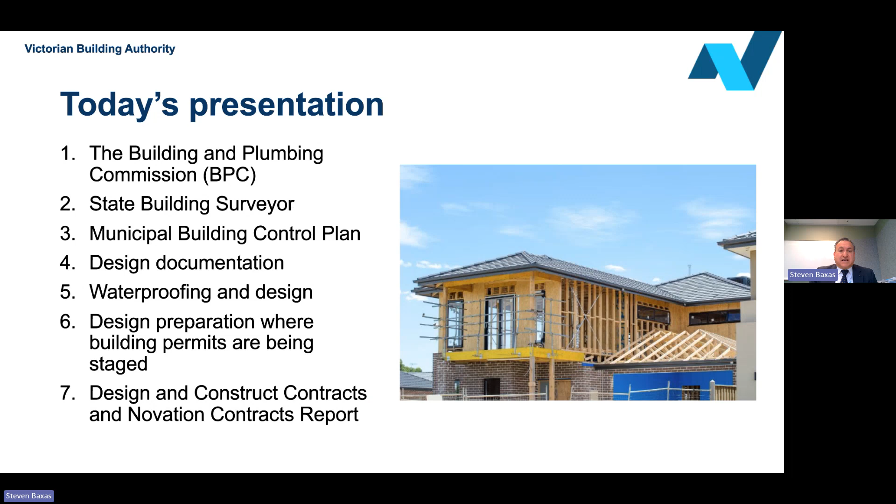So let's kick off with the BPC. So in October 2024, Victoria's new integrated building and plumbing regulator was announced.

So later this year, the VBA will be joining forces with staff from the Domestic Building Insurance Division of the Victorian Managed Insurance Authority. That's a heck of a mouthful. For short, VMIA, and the Domestic Building Disputes Resolution Victoria, which is DBDRV. And that's going to create the new, bigger and better regulator.

So effectively, the new regulator, the new commission, will be a one-stop shop for consumers on building and plumbing related matters. That's effectively the main change, and that's why we're changing. It's not just a changing name, and we know that's happened in the past. This is actually a full and proper redesign, including hundreds of new staff.

So this change is the most significant reform that we've seen in this industry for decades, and it puts consumers and consumer protection clearly at the front in terms of the government's regulatory priorities. Creating an overarching, more powerful regulator that addresses the life cycle of the building process will create a better consumer experience, and that's the hope here, and support improved standards and quality in the building industry overall. So this new entity will be a real game changer for consumers and practitioners and for people in Victoria.

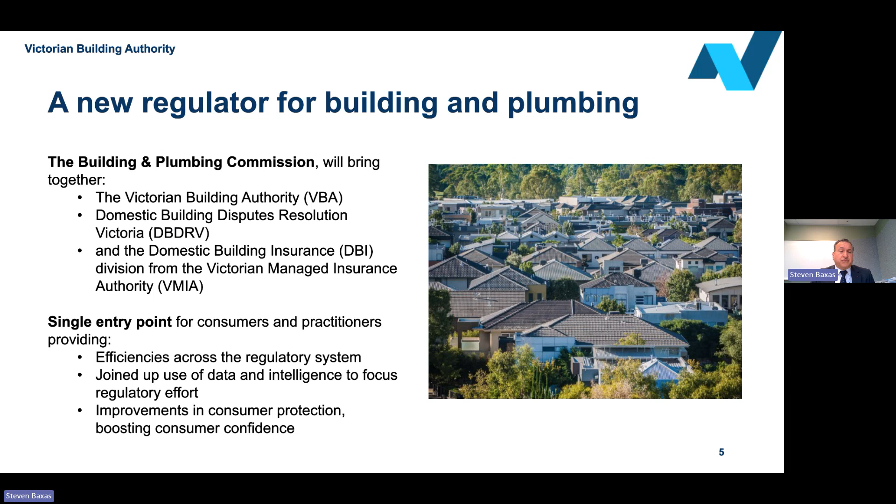So more information will be communicated to industry. You'll all have many opportunities for engagement, and we'll need your views leading up to the changes. It's an incredibly jam-packed reform agenda, 6 bills going to Parliament, numerous regulation changes that will all have RISs. So you'll have plenty of opportunity to have your say, and I encourage you strongly to please read these things, because it's through consultation that we get these things right. So there's a lot happening. Please be involved. So 4 elements of building reform.

The announcement of the formation of the BPC has also heralded a suite of new powers that will effectively improve consumer confidence in the building system. The new rectification order power, you may have heard of, will allow the regulator to act against the builder after an occupancy permit is issued. The rectification order is intended to apply prior to the issue of the OP as well, but more often than not, defects are found after. So this is really important, because it's only after a building is occupied that homeowners and occupants of apartments realise that there's defects in the building.

We'll also require developer bonds for apartment buildings over 3 stories in height. There's an additional requirement, above all this, to notify the VBA 6 months prior to the issue of an occupancy permit, so that the building can be inspected and assessed. And hopefully we can ensure that we catch some of these things before the building is actually occupied.

So domestic building insurance will be expanded and will be a first resort insurance. This is an absolute game changer. So this means that the builder no longer has to be insolvent, disappeared, or died before a DBI claim can be made, as is currently the case with the last resort insurance system that we currently have.

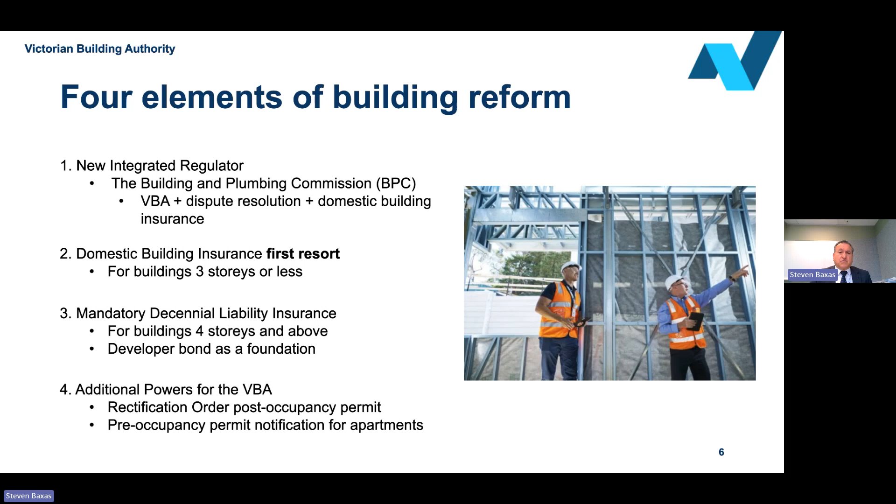I'm going to talk a little bit about the new BPC. So in summary, establishing the new BPC will create a single entry point for consumers. This is the best opportunity that we've had in 30 years to improve consumer confidence and consumer outcomes. A focus of mine as the SBS will be in improving practitioner competency and knowledge. And this is the key to unlocking real change.

Insurance itself isn't the solution for all the problems that we have here. And I'll be addressing some of those additional things that I'm asking practitioners and architects to do. So by equipping builders and plumbers with the information they need to do the right thing, and by providing guidance to other building professionals, in particular building surveyors and architects, we will be helping to reduce defects from occurring in the first place.

So the VBA has pivoted its education focus, and you may have seen some of this, to target the most frequent non-compliances, and is using this as a basis for the current practitioner education series. So we're reaching more people in more places on social media. This is something that the VBA has done that's quite new, and we're quite surprised by the impact that it's had, with the VBA's videos highlighting non-compliances on construction sites. This seems to be something that people are really attracted to and watch.

We're receiving at the moment more than 1.2 million views in the last 12 months. So it's quite significant compared to the way that we were communicating with industry prior to that. These are by far the most popular videos, as I've already stated, and we're going to do more of these because there's a lot of interest in these.

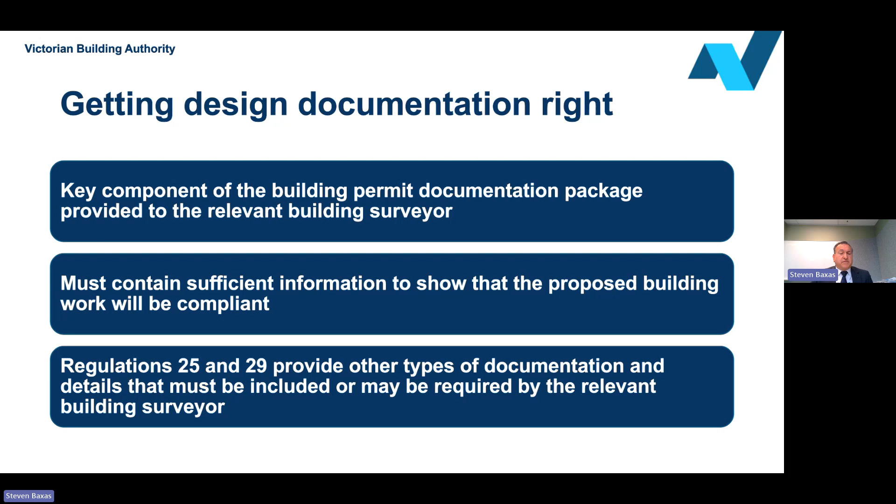So poor design has plagued us, and there's lots of instances of that, and there's lots of anecdotal and real evidence that is the case when we see building defects. So the adequacy of design documentation has been the subject of industry scrutiny, with findings that suggest that there's a real link between poor design documentation and project variations, increased construction costs, and potential non-compliance of building works.

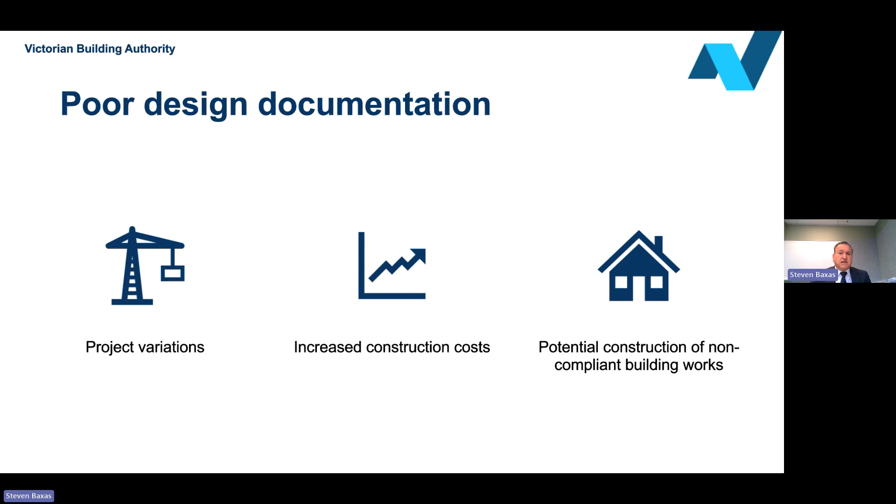So for clarification, my reference to poor means non-compliant and sometimes insufficient. So it's not just non-compliant documentation, it's insufficient documentation. So the VBA's Compliance and Enforcement and Inspection Program, the Building Documentation Audit Program, the Building Confidence Report, as well as incidental and anecdotal feedback from the construction industry, provides evidence that supports these findings, in particular within the multi-residential building sector. And I think the mid-rise buildings, those between 4 and 8 stories, feature quite largely in defect reports.

Design Standards Working Group. So the VBA is actively working with industry to elevate the benchmark of design documentation. We established the Design Standards Working Group some time ago, and it includes stakeholders and members from architectural and draftsperson design groups. This working group tackles a common concern of building surveyors, the role of designers in construction, and the adequacy of documentation prepared and approved as part of the building permit process.

It seeks to develop a practice guide to address issues identified as stemming from poor documentation, investigate the current practices of documentation for building permits by design practitioners, and importantly, sets out the minimum standards and details required in the design documentation by an RBS when assessing an application for a building permit prior to the issue of that permit.

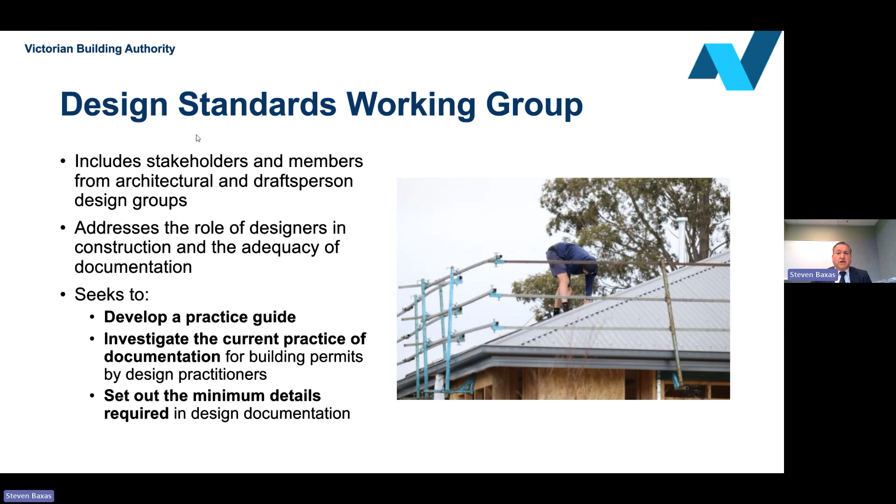So the practice guide's been advocated by industry and was highlighted in both the expert panel building system review and the building confidence report as key areas that require to be addressed. So the practice guide was developed to help improve design documentation by highlighting information required and how compliance details and supporting information can be documented for building and structural designs. So hopefully it's been used. We've had some great feedback about this document, which has caused us to expand it to other classes.

I want to talk a little bit about waterproofing and design. So the VBA's regulatory priorities inform industry, consumers and other regulators of our areas of focus to address the most significant harms in our built environment. One of the 6 regulatory priorities is water ingress in buildings. This is where design plays a really big role. Waterproofing defects can have significant impact on homeowners, communities and the economy, indirectly. Impacts of water ingress include costs to rectify the defects, increasing maintenance costs, increased insurance premiums, which ultimately reduce consumer confidence in the building and construction industry.

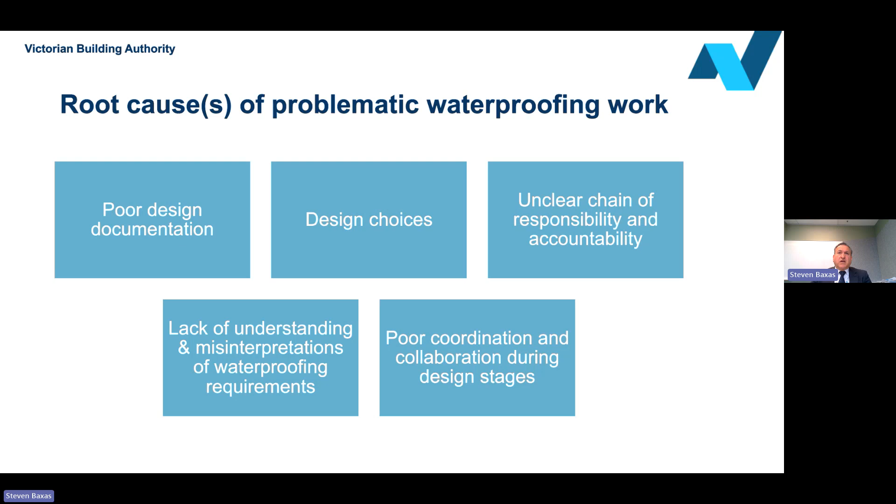So, improvement opportunities for waterproofing. So the research identified improvement opportunities for building design, certification, construction, inspection, and improved guidance for waterproofing, including improved practitioner education and awareness around high-risk areas such as balcony design, construction, and water tightness of external building envelopes, and the consequences of poor waterproofing and waterproofing practices.

Prescribed critical details for inclusion in drawings and building plans, increased supervision of the design and construction of balconies and other high-risk building elements such as roofing, waterproofing through mandatory inspections, which has also been proposed. And you may have heard something about that. There's a regulatory impact statement about to come out that's going to detail that a little bit further.

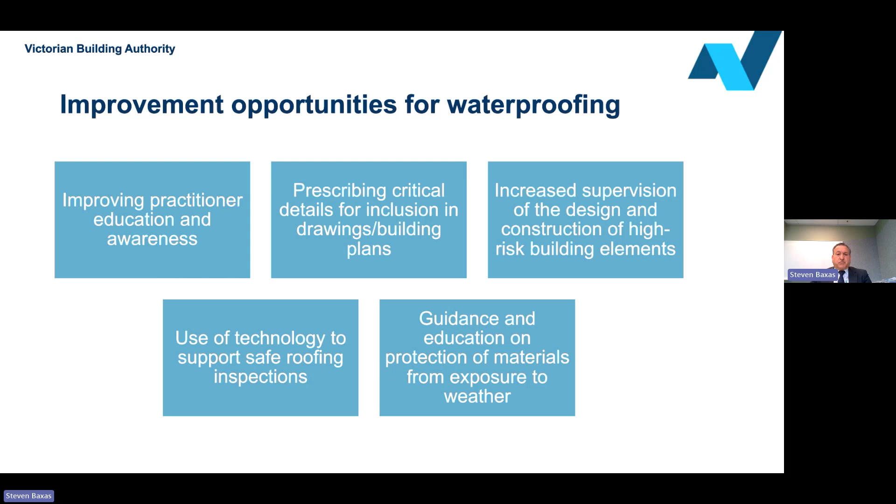And again, that's an opportunity for you to talk a little bit about your views on these additional inspections, one of which is waterproofing. Developing guidance and education on protection of construction materials from exposure to weather. That's another thing that we need to sort of have some regard to.

So NCC 2025, now we don't really have a date for the introduction of the NCC 25 at this stage. I understand it has been delayed, but we just don't know for how long. So the ABCB are proposing changes when it does come in Volume 1 to help reduce the incidence of building defects resulting from water ingress. So these changes went out for consultation through public comment last year. You may have seen that and hopefully you've contributed to that.

So these changes include new DTS provisions for drainage and grading of external areas, which will establish grades to structural substrates in buildings and building elements such as concrete roofs, balconies, podiums, and similar parts of buildings. This will require concrete roofs, balconies, podiums to have step downs from internal areas to external areas. Additionally, these areas would require integral hobs at their perimeters. It also includes a new DTS provision for substrate materials to require a structural substrate in the building or part of the building of a roof, balcony, podium, or similar level.

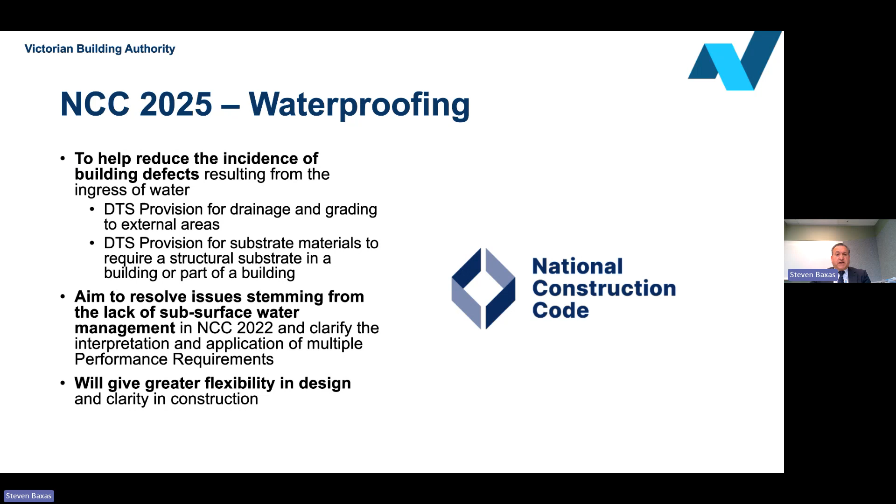So these changes aim to resolve the issues stemming from the lack of subsurface water management that appear in NCC 22. There's very little in NCC 22 that addresses that, and clarify the interpretation and application of multiple performance requirements. So it's a more holistic approach to water management by including these provisions to address subsurface water in addition to the current requirements for surface water. These changes will require more design documentation, and this is where you come in, and collaboration between designers, building surveyors, and builders.

So design preparation where building permits are being staged. This is another real area of concern that we're having. Staged building permits provide a significant challenge to achieving compliance, in particular for large building projects where the design and construct method is predominantly used. I think we're seeing that more and more in larger buildings. Our legislation is clear. The RBS must be satisfied that the design submitted prior to the issuing of a building permit and each stage of a building permit must demonstrate compliance in its own right in order for the RBS to be satisfied and issue a building permit for that stage.

However, in these staged works, there are challenges for the design team and the RBS in ensuring the proposed design as submitted clearly demonstrates compliance with the overall and then broken down into stages of the works. So additionally, once the building work has commenced on site and as part of the initial building permit stage, it becomes further challenging for the RBS to ensure that only the stage approved has actually been constructed. I think that's a real challenge for the building surveyor. It's very difficult to slow a job down or stop a job once it's constructed, and it's incumbent on the building surveyor and everyone else involved to keep up. But the builder's definitely doing something wrong if they're building beyond the stage.

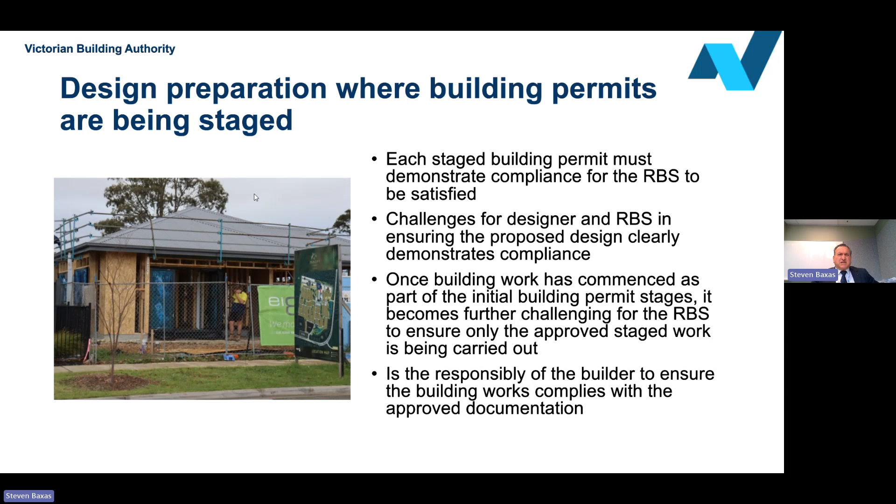So I'm going to talk a little bit about D&C contracts now. So as part of the 2021 work plan, the BRAC, which is the Building Regulations Advisory Committee, undertook to examine and make recommendations to the Minister for Planning on D&C contracts and novation contracts.

They developed a report on the effect on the building sector of design and construct and novation contracts. That identified the adverse impacts of these contracts on the construction sector. They identified proposals for improvement, and it articulated a plan to deliver these improvements. There was understanding that D&C contracts and novated contracts increased risk for the consultant team, and it is also contributing to the professional indemnity insurance crisis that we're facing right now in the sector.

I know Frances will speak more about this topic next, but I wanted to reinforce that D&C contracts do not supersede the requirements of the Building Act. Whilst a builder can change the design of a building during construction, they cannot build those changes until the building permit documentation has been updated, and that's really where you come into it, and until the building surveyor has actually amended the drawings.

So this is an area of focus for me right now in my role, in talking to the whole sector about making sure that they're getting this right. It's crucial to ensure that the design of the building is complete.

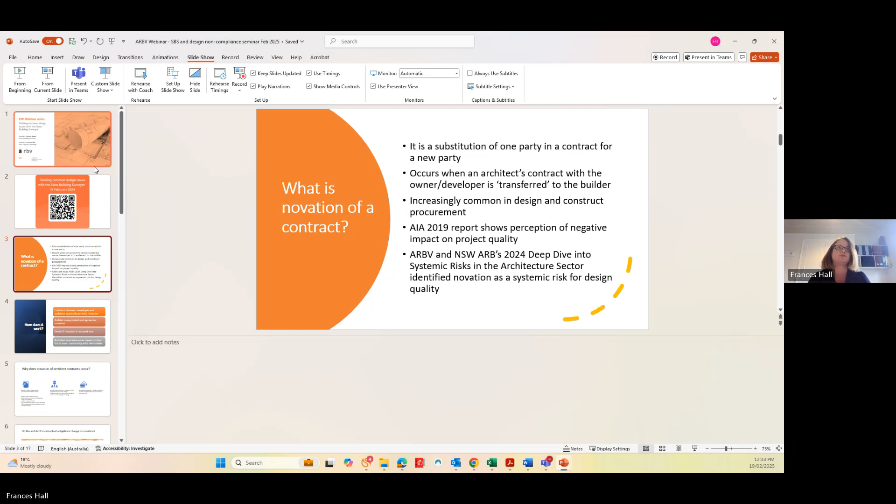I'm just going to increase my slides. Hopefully people can see that.

So how does novation work? The way it works is that a developer and architect enter into a contract. That contract will expressly permit the later novation of the architect. The architect prepares a preliminary design. The design goes out to tender. A builder is appointed, and in the agreement between the builder and the principal, the builder agrees to novation.

So a deed of novation is then entered into, and that means that all of the obligations that the architect previously owed to the owner or developer are now owed to the builder. So it's the same contract. It doesn't necessarily mean that the obligations have changed, but from the architect's perspective, your obligations are now owed to a different party, being the builder.

So why does novation of architect contracts occur? It occurs because it provides some benefit to the principal in that the builder accepts obligation for meeting the design requirements in the preliminary design, as well as for constructing the building. It also means that there is a benefit to the builder because the builder is able to tender for a fixed price, but then engage in a value management process to save on the build cost.

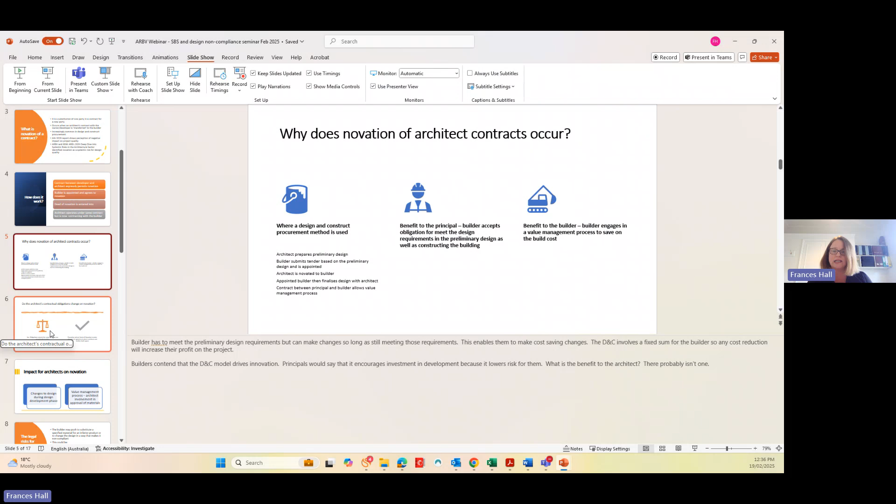Bear with me, I'm just going to change into presentation mode. Hopefully that's better. Apologies for that.

Do the architect's contractual obligations change on novation? As I mentioned just now, no, they don't. The obligations remain the same, but they're owed to the builder. And the only exception to that is where the deed of novation creates changes to the agreement, and that would involve both the architect and the builder agreeing to that.

So why is that important? It's important because it means that you as architect still need to comply with the terms as specified in the contract. So, for example, if the contract specifies that you are responsible for design compliance, that doesn't change when you are novated to the builder. That contractual obligation will still exist.

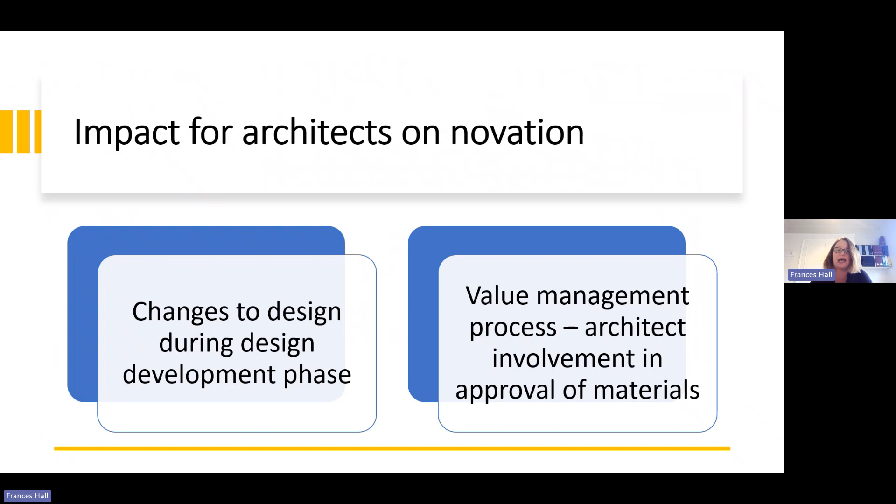What that means for the architect is that it essentially creates a problem, because the contractual obligations on the architect to comply with, for example, a contractual provision requiring design compliance might not be consistent with this value management process. It also creates a problem because, as Steve has pointed out, the building work is still required to comply with the designs that have been approved in the building permit. And I'll talk a bit more about that in a minute.

So what might happen? The builder might push to substitute a specified material for an inferior product, or they may seek to change the design in a way that makes it easier and therefore cheaper for them to build, but that might not be compliant either with the building code, or it might not be compliant with the permit, which has been approved on the basis of a specific design.

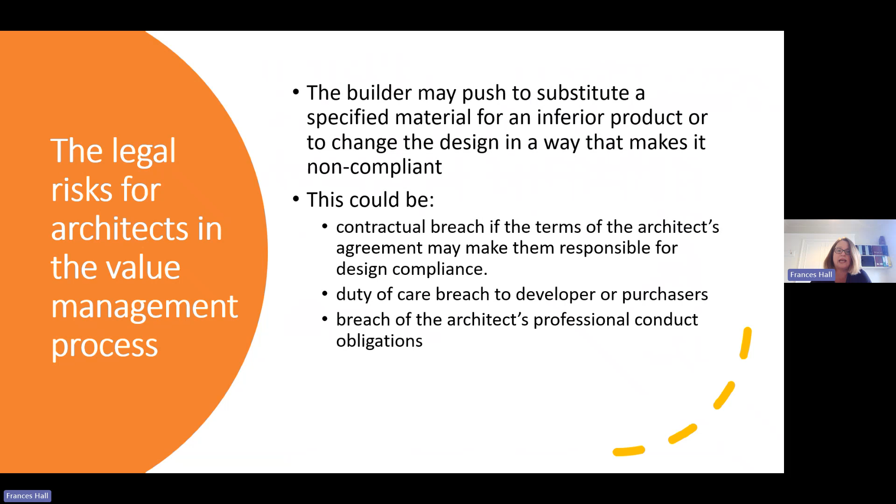So this could be problematic in a number of ways. It could be a contractual breach if the terms of the architect's agreement make them responsible for design compliance. It may constitute a duty of care breach to developers or purchasers, and it could be a breach of the architect's professional conduct obligations. So there's a lot of risk sitting for architects in this process.

I've created this slide because I think that builders don't understand particularly well the distinction between contractual obligations and legislative obligations. And I think it's a good idea for everyone involved in building work to really apply their minds to that. So builders may have entered into a design and construct contract, which contractually allows them to make changes to the design, but under Section 16 of the Building Act, the building work must comply with the building permit.

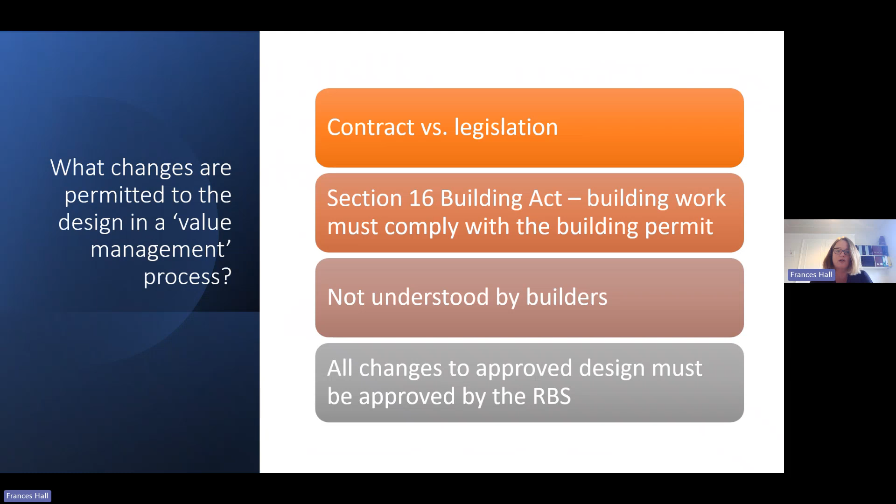So they can't just go off on a frolic and change whatever they like. The design still has to comply with what's been approved by the building surveyor. And if it doesn't, then it needs to go back to the building surveyor for consideration. So that's important, I think, for everyone to understand.

I've just also put in a comment about performance solutions, because this is something that does crop up in the context of either insufficient details being in drawings, or in the context of last minute changes to drawings.

So performance solutions, as I'm sure you would all be aware, can be used to demonstrate the compliance of a design with the relevant operative provisions of the National Construction Code. Performance solutions have to be prepared and assessed in a particular way as part of issuing the building permit.

But what you can't do is where there is insufficient detail in the drawings, and take, for example, the scenario that Steve posited to you, where there are no details regarding the guttering, and a plumber has gone up and tried to retrospectively create a box gutter. You can't retrospectively create a performance solution and then say, look, we've complied with the BCA because here is a performance solution. That's not the way the process works.

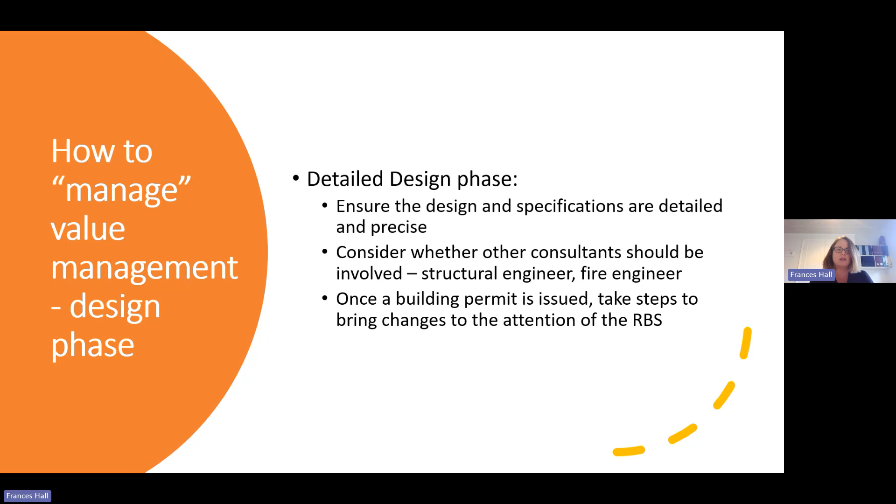Other steps that you can take during the detailed design phase are to, as Steve has mentioned, ensure that the design and the specifications are detailed, complete and precise, and to consider whether other consultants could be involved, such as the structural engineer or the fire engineer. And once a building permit has been issued, take steps to bring any proposed changes to the attention of the RBS if you believe that what is being proposed goes outside what's been approved. That's a step that you can take to protect your position.

Now, in the construction phase, there are some additional steps that you can take to manage this value management process that builders are imposing. Where you are required to approve materials, you should really turn your mind in a lot of detail to what the specifications require about the compliance of products or materials. And that isn't just the specific clauses of the spec that go to this particular product, but also the general clauses in the specification. Do the general clauses require you to consider compliance?

And if they do, then you should be making sure that you're calling for the right documentary evidence that supports that compliance. And in addition, where you are supplied with documentary evidence about compliance, take a good look at the material and ask yourself, does this documentary evidence specifically relate to this type of use of this product?

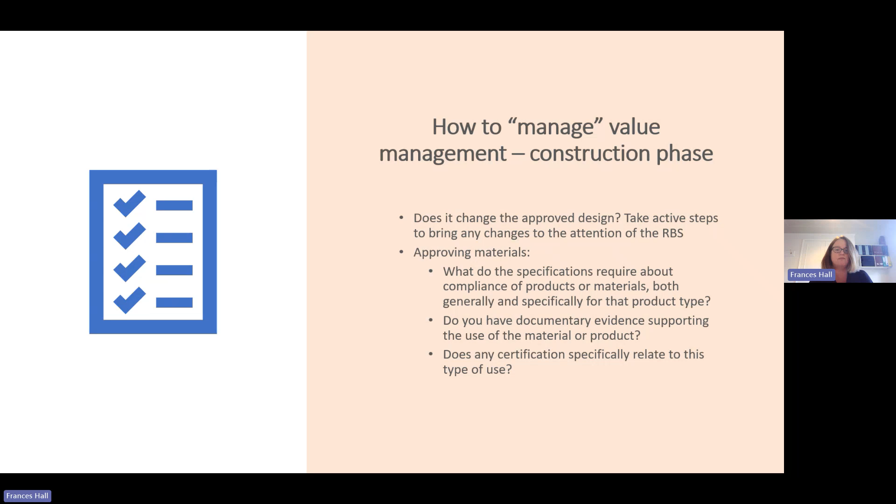So my conclusion in terms of architects being able to manage the risk that is posed to them by the design and construct model and the novation to a builder: know your contract terms, and if you can reduce your risk in that contract, then you should try to do so. Ensure that your designs are as specific and detailed as possible.

Where changes are proposed, collaborate with other consulting practitioners. Make sure that if changes are proposed after the building permit is issued, that material changes are run past the building surveyor. And where approving material selections, consider whether the suitability of the product is proven for that specific use.